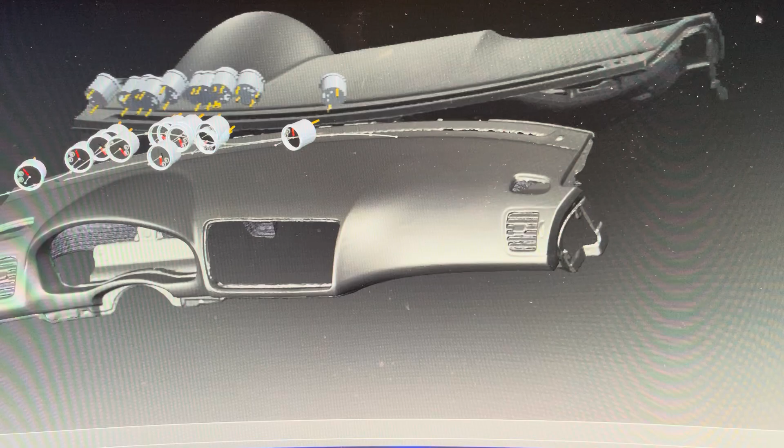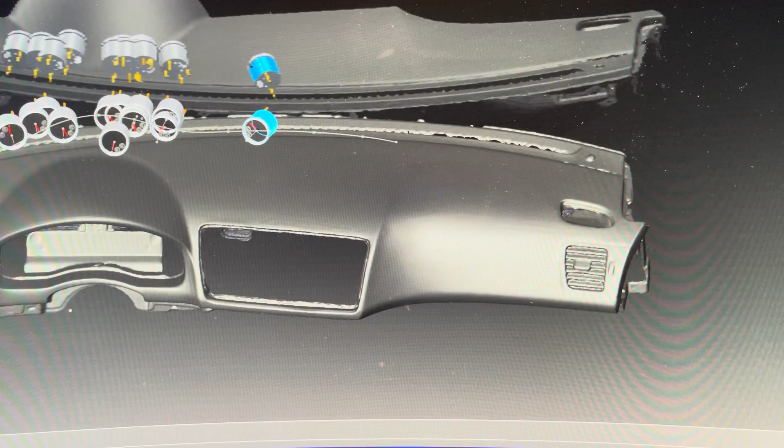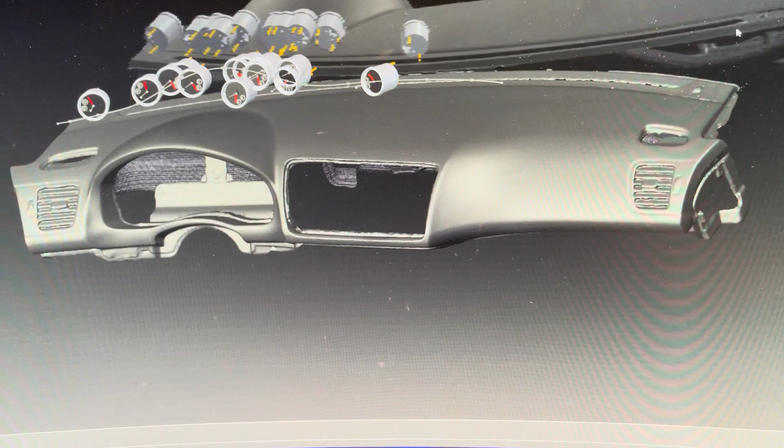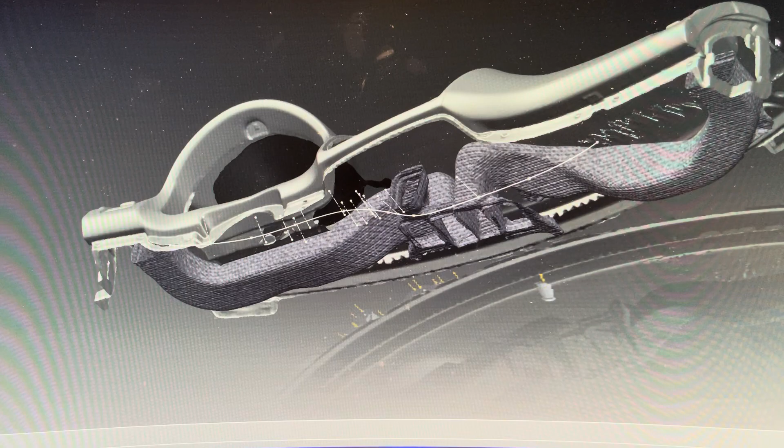You can see the spline line is sort of indicative of how that's going to look. So some of the levels - there's a lot of stories involved with 3D scanning this dash. Three different cars contributed to the form of this dash. This is also a non-finished temporary state. I do intend on making a much more perfected part for this dash. But this is pretty awesome as is, and much better than anything you can find online with scouring the web for 3D models, which I've done and found that they're pretty inaccurate.

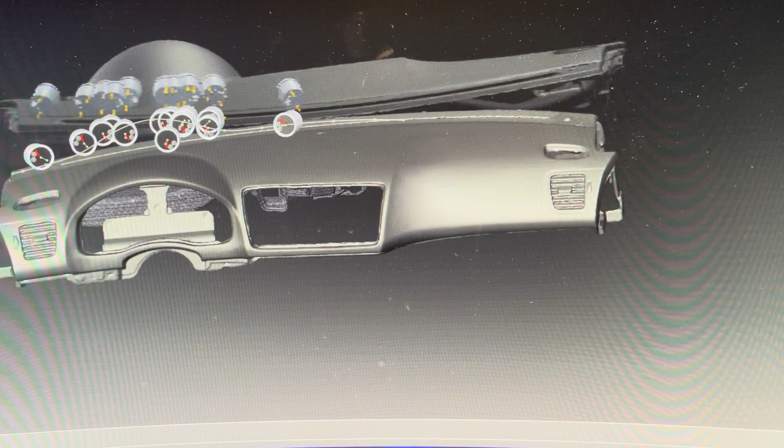So 3D scanning is a new thing I've been getting into, and reverse engineering.

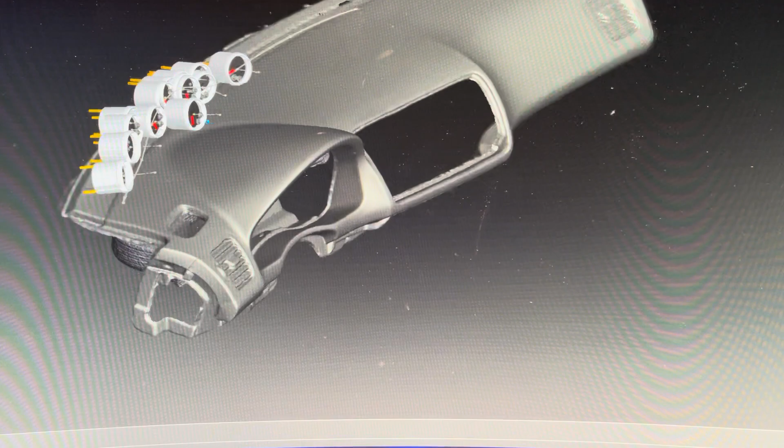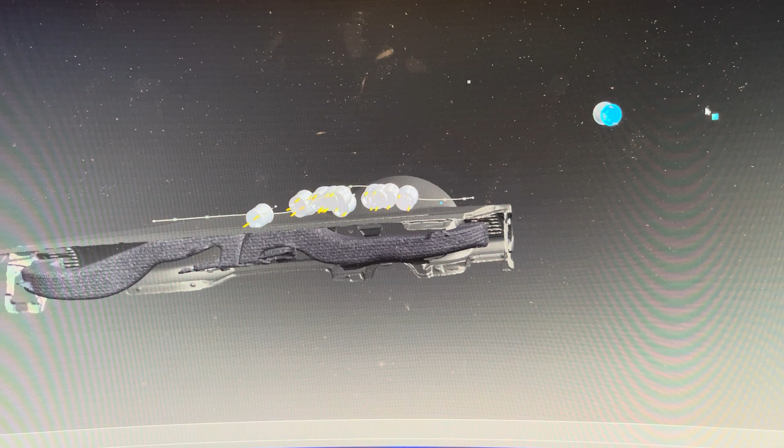So I modeled up these gauges, and I just went in and added this construction line to each of them, and mated those in an assembly to - can you see it? This point right here. This point is special. It represents the focal point of the driver's eyes. I'm going to have each of these gauges pointing to that focal point. So currently these aren't all mated. No matter where I move this, it's going to be line of sight to that focal point.

Cool, so then I can mate each gauge start of that line to this spline, and then they follow it like this guy.

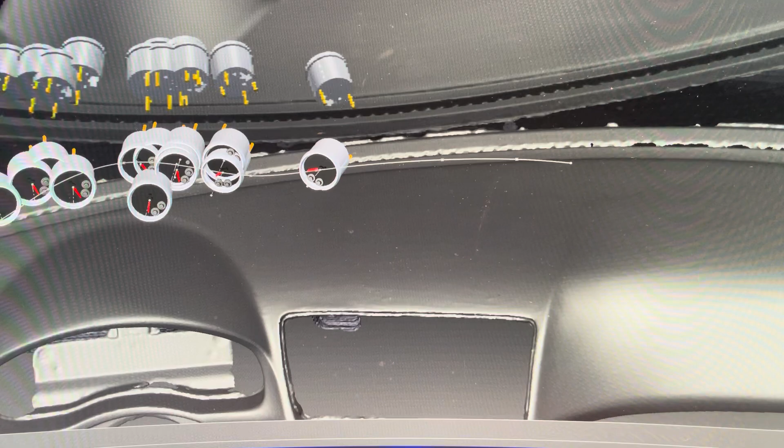One thing though, you can't just in CAD do what you want - it takes a lot of thought to get to where you want to go, and you sort of got to think about and plan before you act. You can't do all of what you see here in one part or one assembly, and so it becomes a hierarchy of parts and assemblies, and then a hierarchy of how many assemblies, and then your relations between parts and assemblies exist on which part and which assemblies.

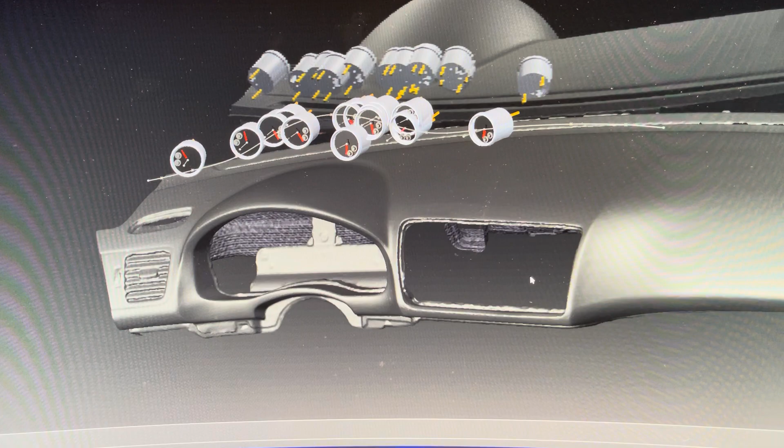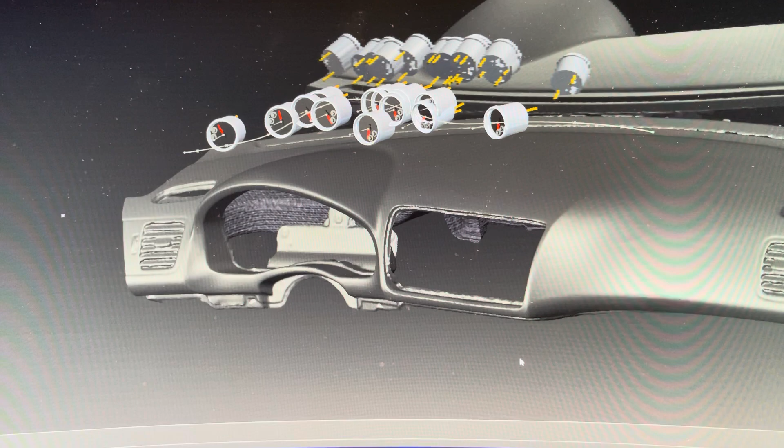It kind of reminds me of classical composition, most utilized in painting. I've been an artist all my life, so once I learned classical composition, I then began to look at a canvas probably longer than I would spend painting on it, to the point where I would often decide not to begin painting, because the idea of coming up with a plan was so difficult - you can shoot things down and it's hard to be creative knowing all of the restrictions required to see the composition to success.

Because then you learn that art has structure, and then you start judging art that you can see clearly has no structure. For me, there was no going back at that point.

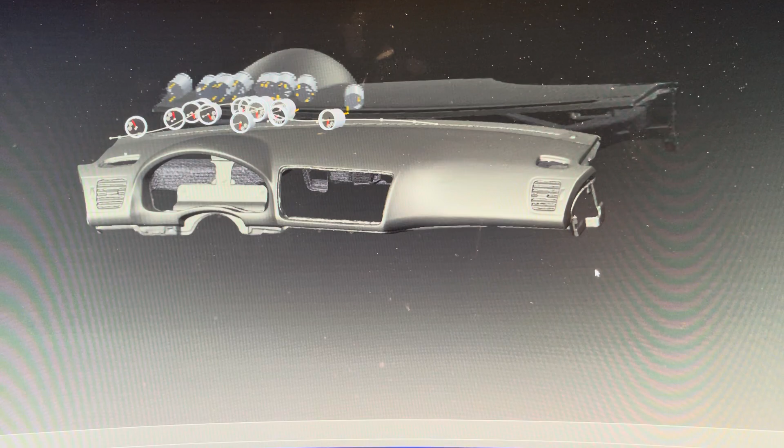Where that relates to something like designing car parts is having a good plan so that you have an intelligent model that will take the least amount of time to get to your result and to get to a successful result.

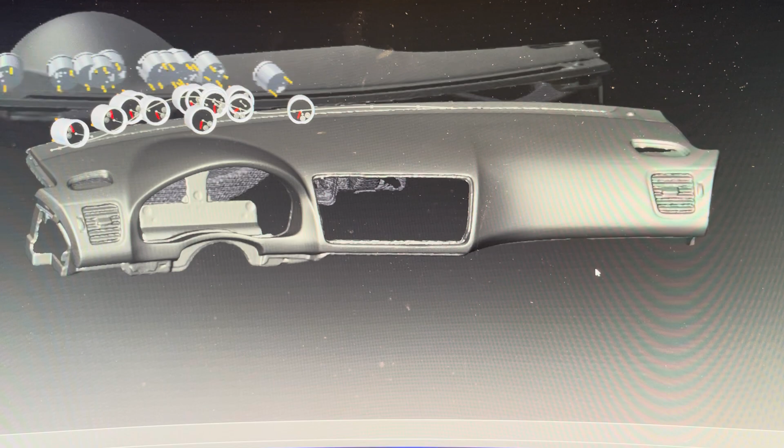If I showed you my assembly tree here, there are multiple levels to this that I've backed out on. I can create as many, you know, create new assemblies and delete them and change my path. Currently I'm excited about this.

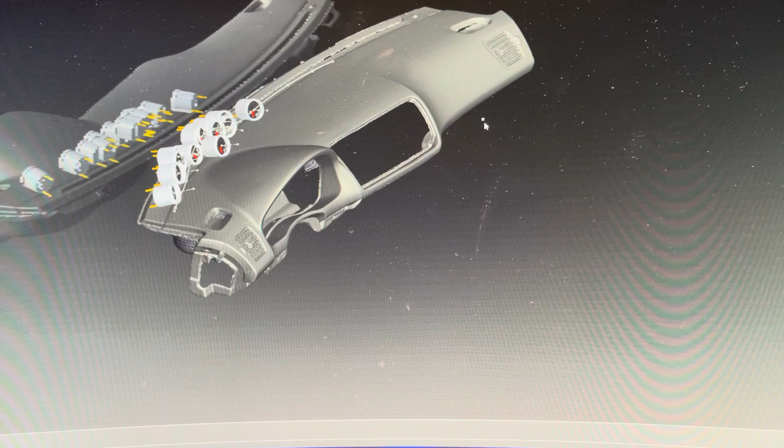So let's get into it a little bit. This dot, this focal point - how did I even get that? How do I know that that's accurate? And also, how do you even - I know this is such an underrated thing.

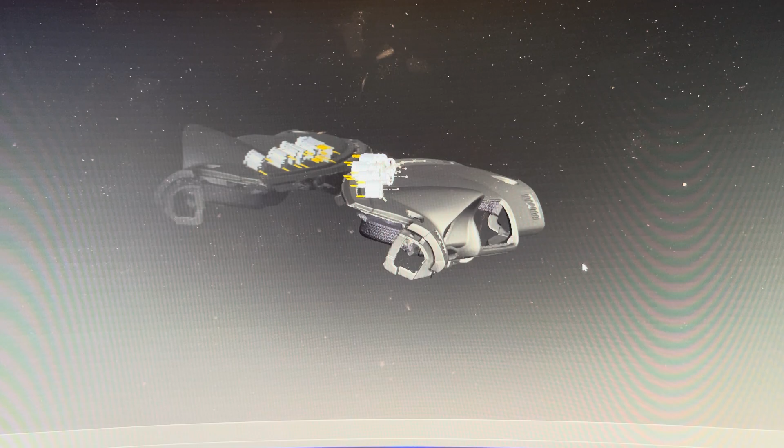Most people probably would never think about it, but just your initial coordinate system with any 3D scan - it's one of the most difficult things in all of 3D scanning and reverse engineering that I could possibly think of. And if you think about it, it might be hard to come to that conclusion.

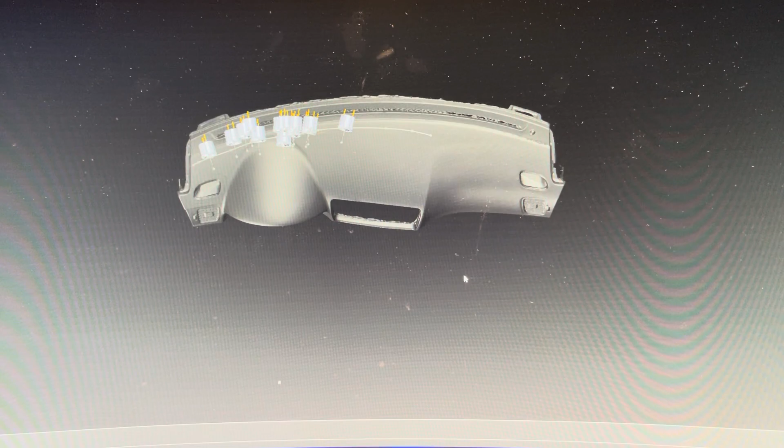With my 3D mouse, I like to snap to nice orthogonal views, but that's something you take for granted. When you build up a model in CAD, you have that from the start. It's the opposite with 3D scanning and reverse engineering. So how accurate is your coordinate system that you create?

I don't think, on my main car project here, which I'm about to show, I'm not sure how accurate it'll ever get to. But I've gotten to a point of decent accuracy that I can use a fair amount of engineering logic to corroborate that it's pretty close.

And so with hierarchies of assemblies, I just simply have this series of models and assemblies in my master assembly. Let's have a look at that.

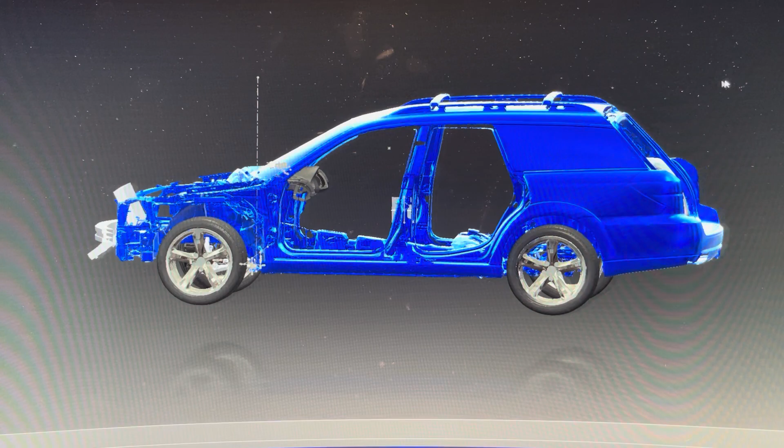Side note, this is a model I found for free online.

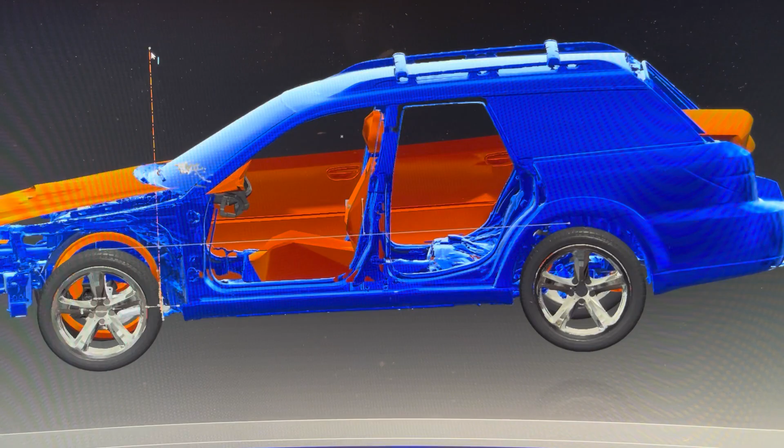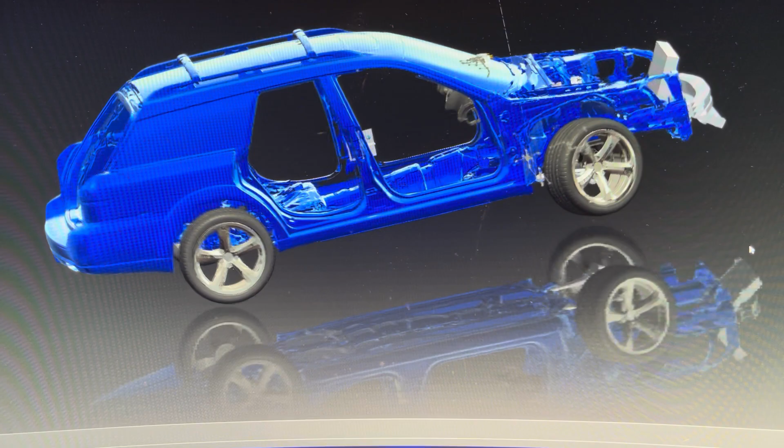I think SolidWorks is having a little issue displaying it here. Graphical error. I was going to show you a difference between sedan and wagon. Anyway, the model is terribly inaccurate. I do know that my 3D scan model, over 80 scans combined with many months of work, is far more accurate than that.

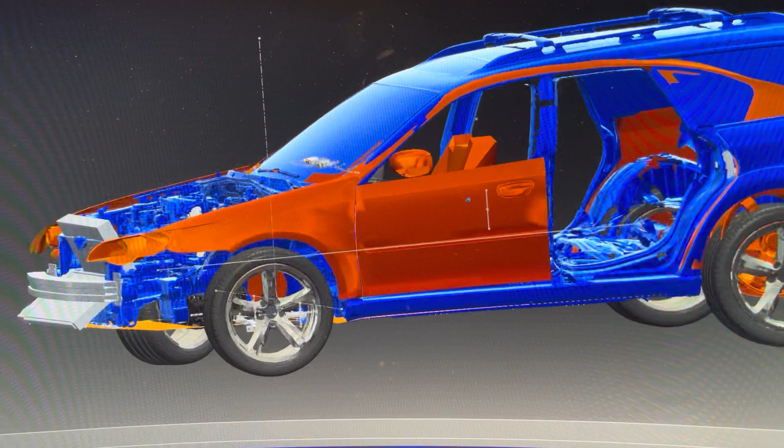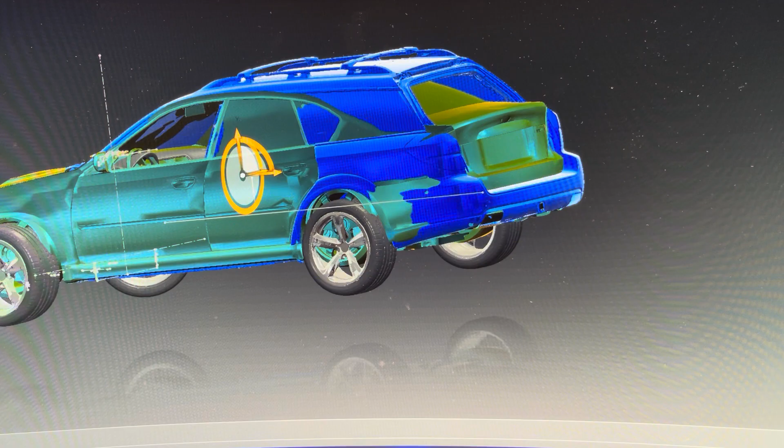I found two models online, and they both had dashes, and they were both incredibly off. However, that sedan, I did use its driver's seat to help create this dot. Since I didn't model the seats in my car, I had a view from the side, then a view from behind, and in a 3D sketch in the right assembly, just one dot gave me my focal point. Pretty important. I can edit it later.

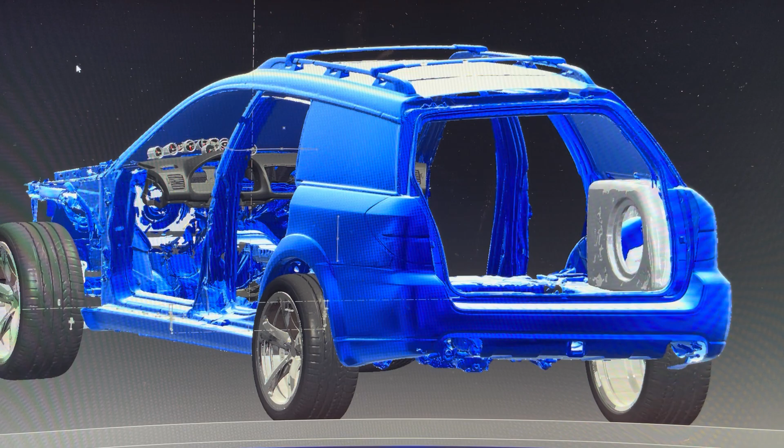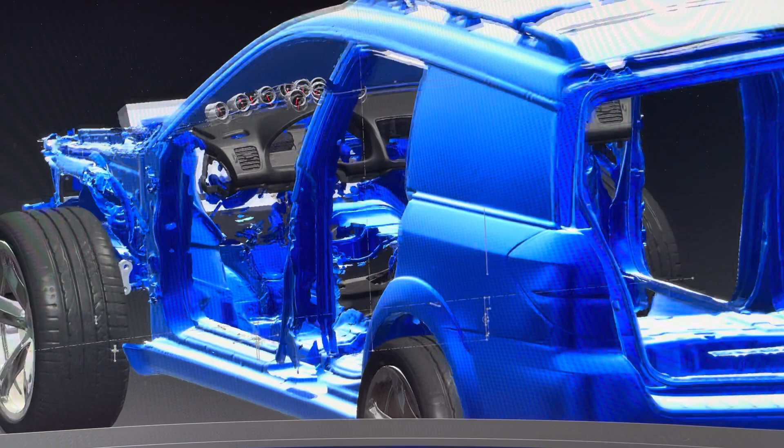The key thing about all of this is making design decisions editable down the road. So once I make a very complex gauge pod, it will all update just by moving that dot, as well as other updates. I can move any little position on this spline and everything will update. The worst thing you could do is make a model you spent so much time on where all the design criteria is fixed and you can't change anything later. So I'm creating constraints wherever I can, while still having freedom in all the places I could possibly want it.

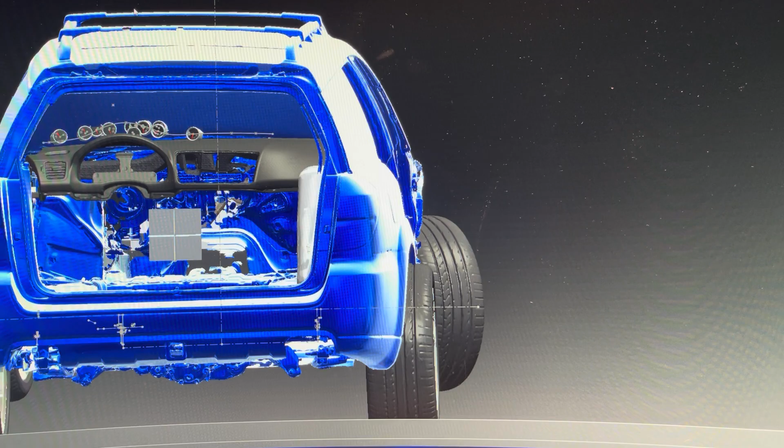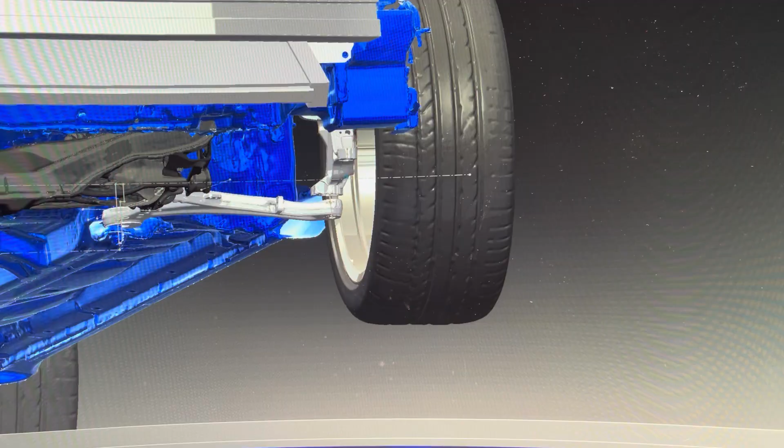Quick look at some of my model here, because there's nothing I can't show. You can see some of my reverse engineered parts, the suspension I'm working on. This is all movable and accurate. Pretty exciting.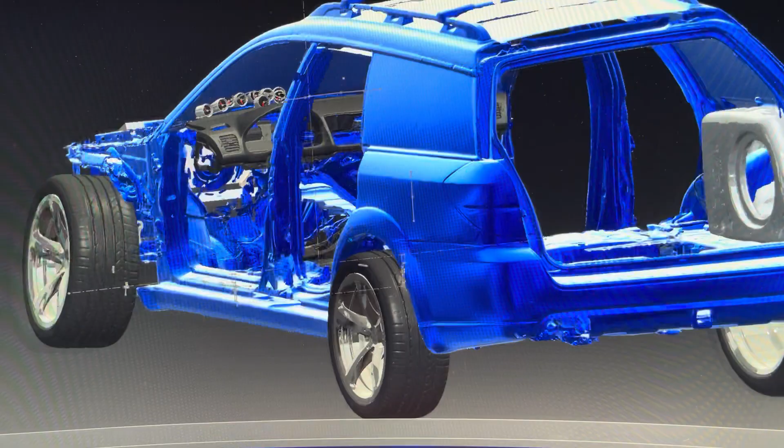Enough of that though. So I put this series of assemblies in my master assembly just to position this, and then when I go back — actually that was the wrong level. See, I have multiple, I'm gonna lose track here. They look identical, I have identical looking assemblies. I added a 1 on this part. Okay, so this is negative 1.

So the focal point, these point to that, and then when I'm in my other assembly — here it is — this is the assembly where I'm actually building the cluster itself. I don't think I added the... I'm just gonna do that right now. These parts are gonna be the first of what I build for the gauge pod.

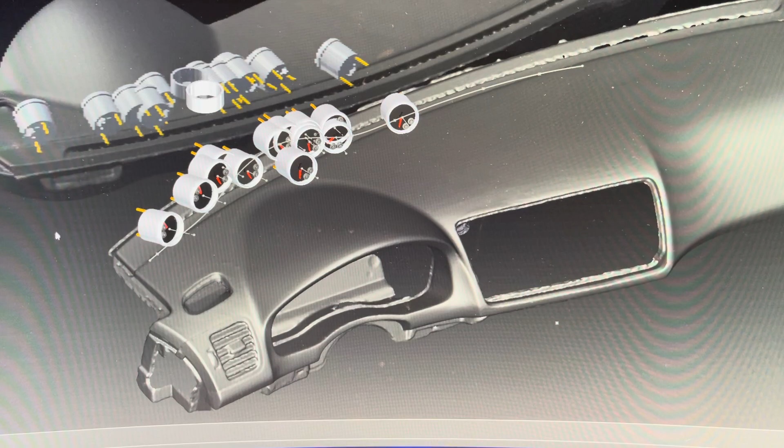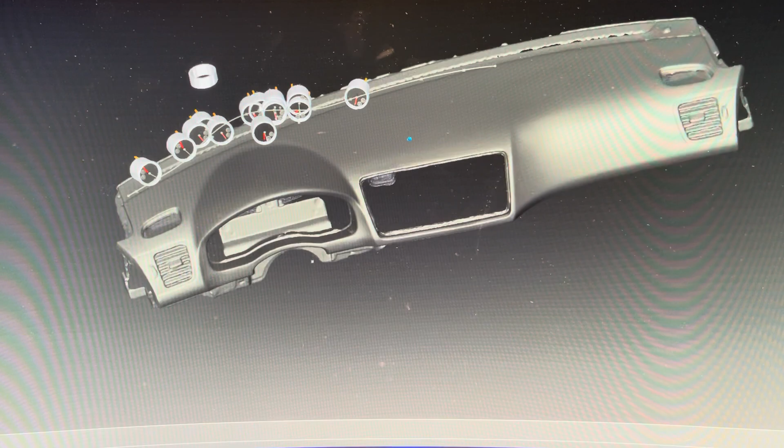A decision there too: you can do a lot of modeling all within a part file, but you can also make an assembly built on any number of parts and assemblies, and convert it all to a part later. The benefit you get from doing that is more control in the CAD software over all the individual components. Trying to make a part in a part is a terrible experience.

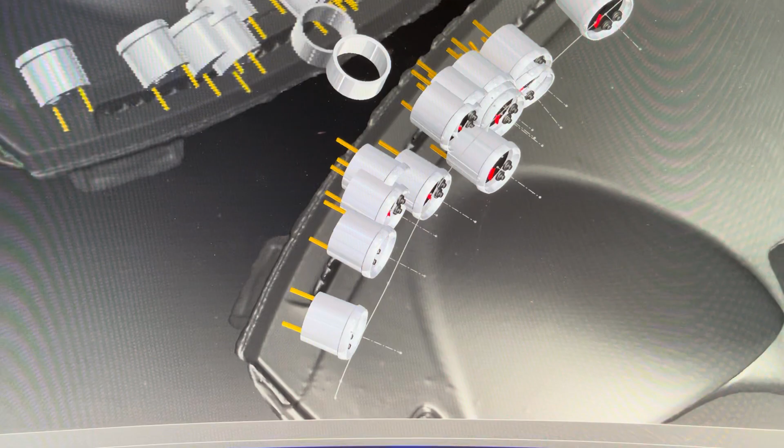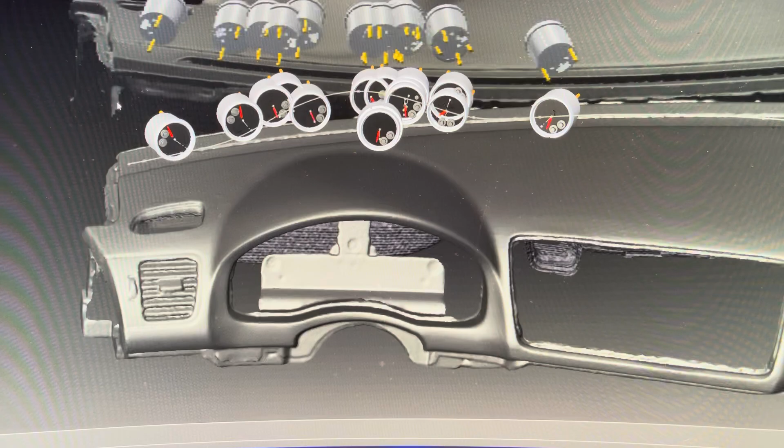Well, I might be twiddling my thumbs on anything left to say at this point. I think I said what I want to say. The rest is going to be exploration and doing the work, doing what I love with designing things.

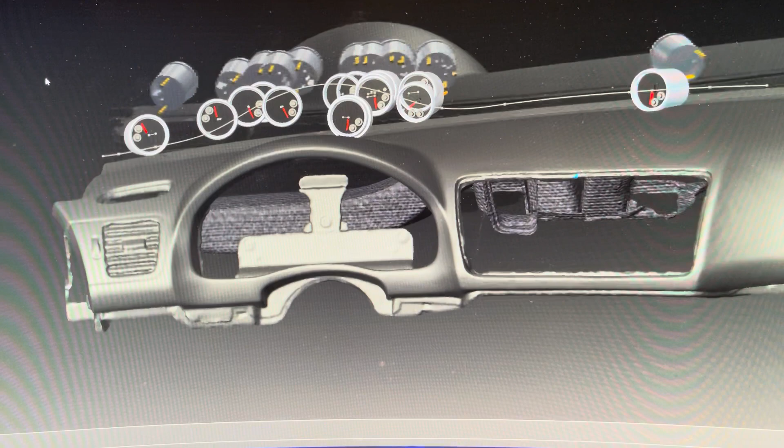Setting up the structures based on logic that I choose, and then once I see what I have, adjusting it there. Like you go look at a paint swatch at the Home Depot or something, the color you want to paint your house, and then you paint it, and you wish you could change it because it's not what you thought from looking at the swatch.

Yeah, good times. Also, everyone's telling me don't go with these old school gauges, you should just connect all your sensors to a digital display. And I guess clearly I'm old school. When I was younger, I saw gauges like this on race cars, and I wanted them. And now that I have them, I want them.

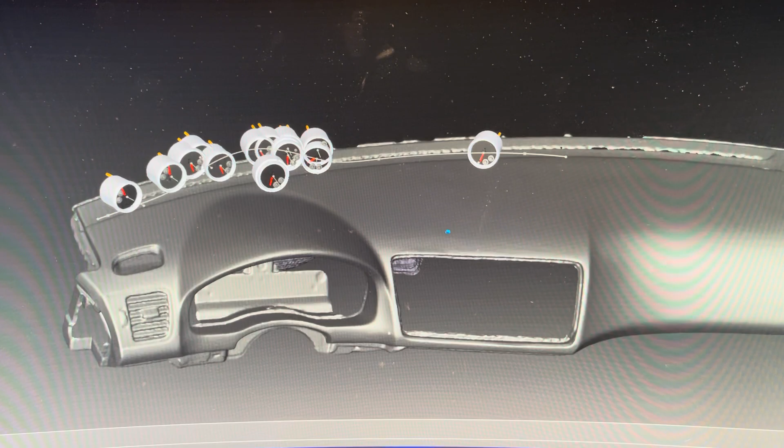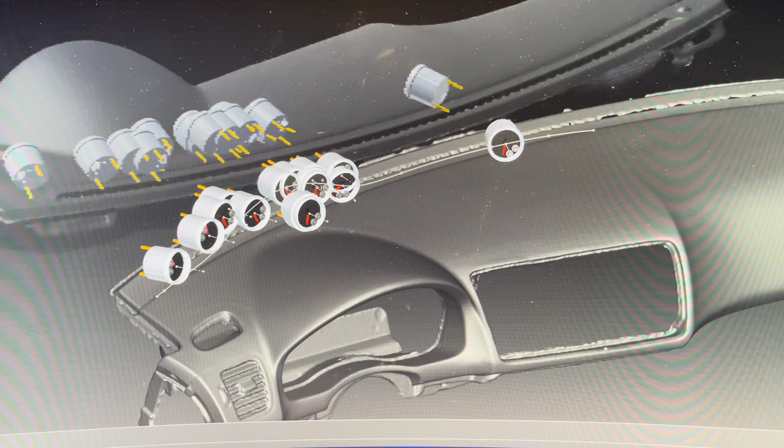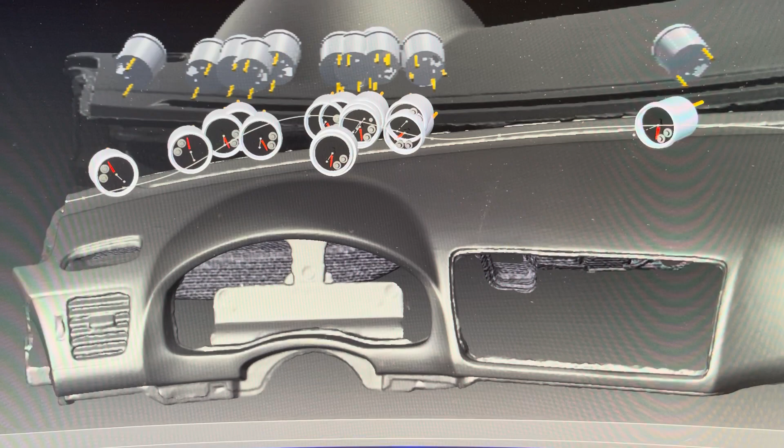With the logic I have now, there's one thing I can say: for reliability, I certainly do appreciate independent systems. These gauges, though they are all electric, they still boot up, if you will, and get to operating conditions much faster than — well, I shouldn't say any, because I'm not too versed on them — but my experience with digital displays is there's a little more boot time. And these are truly all independent systems, so if one thing goes down, not all go down.

Other people might say a properly tuned car doesn't need any gauges. Well, tell that to the vehicle company I worked for in the past, who retrofit their vehicles with a massive amount of sensors in the test engineering department. And that's how I view my hobby here.

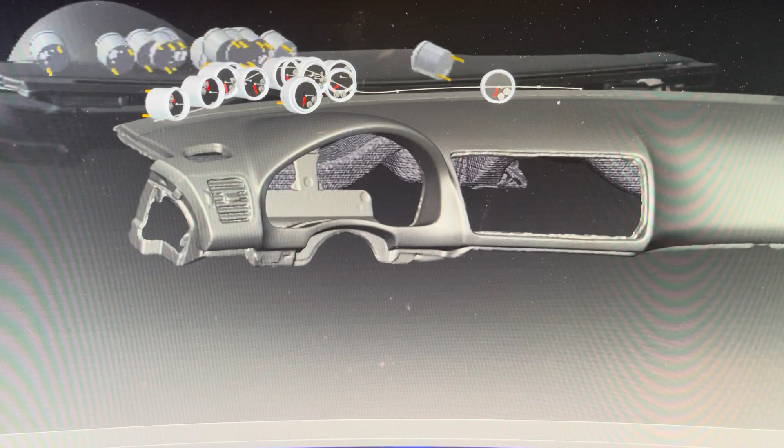It's a compound turbo, unique vehicle, and I enjoy watching gauges, so I'm gonna do what I'm gonna do. Fun project, infinite projects on my car. Although in my old age here, I try to limit downtime. So, the car's driving pretty well, and this is just gonna be a nice add-on that I hope to get done sooner than later, but it's one of many projects.